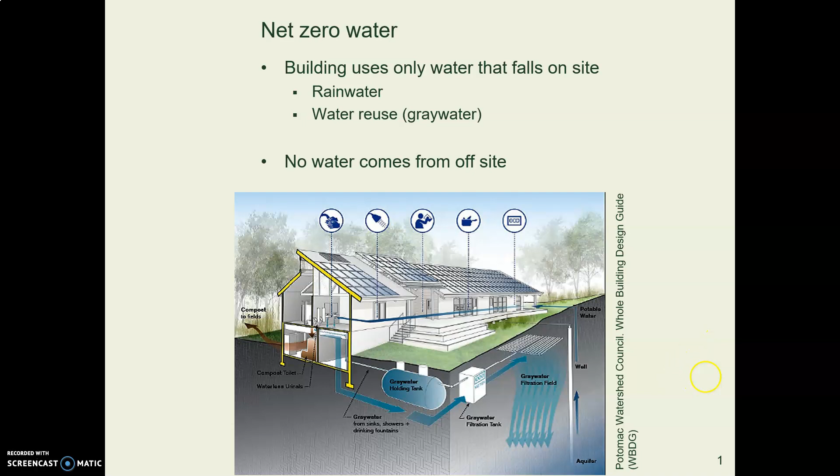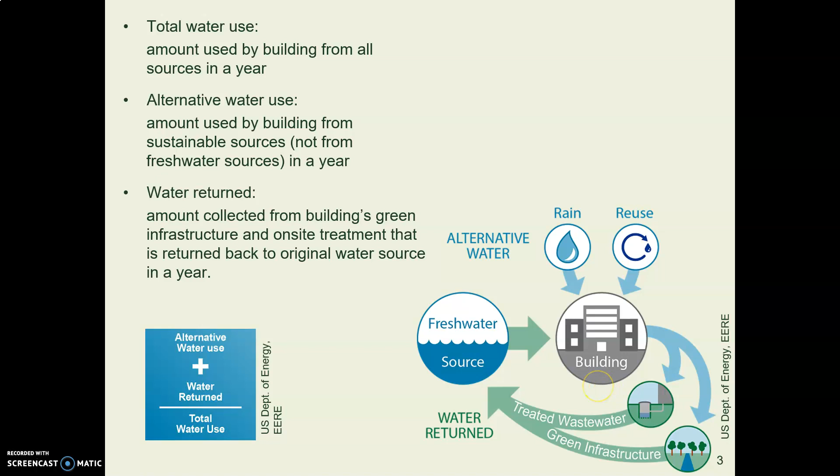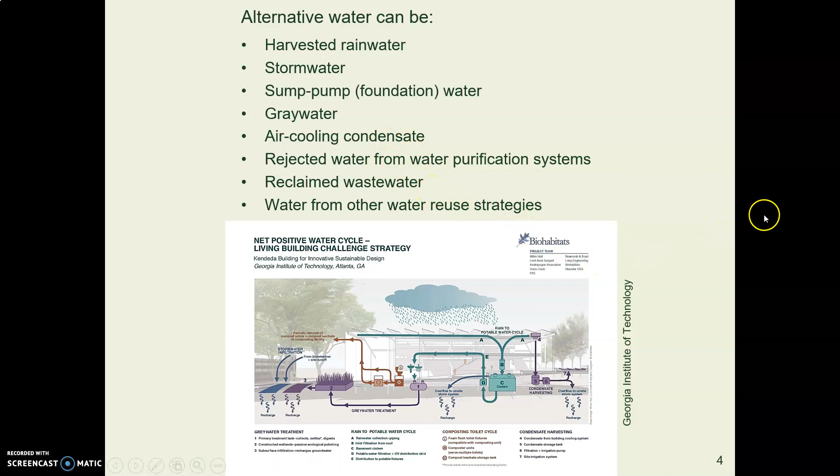This approach relies heavily on alternative sources, and there are a whole bunch of them. We've talked about harvesting rainwater. We can infiltrate stormwater. There are all kinds of gray water sources that come off of buildings, from foundation pumps, gray water, condensate from air cooling, and reclaimed wastewater.

As with renewable energy, where your first step is to reduce demand and do energy efficiency, with water, your first step is to reduce demand, do water conservation, and promote water efficiency. Then after you've done that, you've got your demand down, then you go look for alternative sources and see what else you can do.

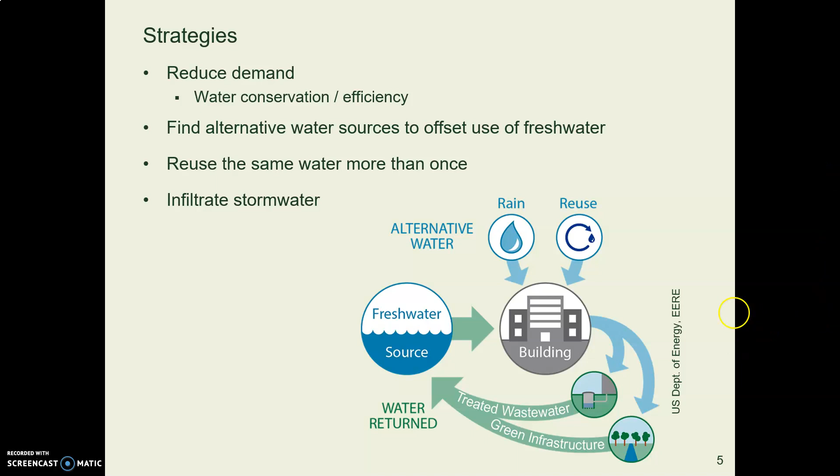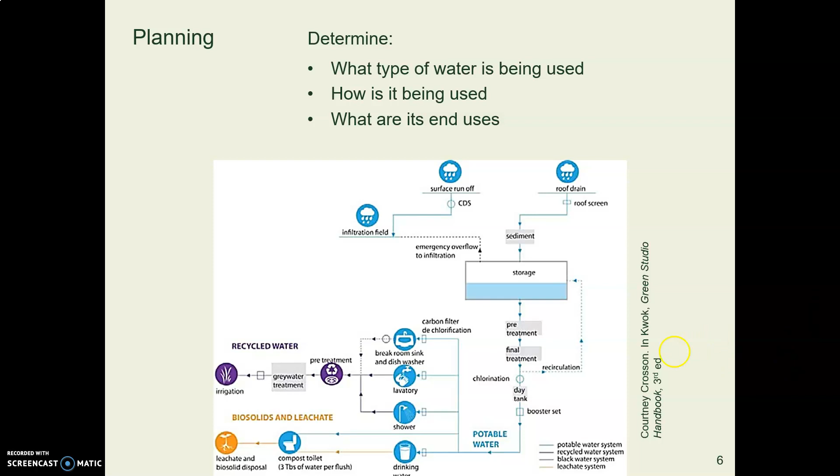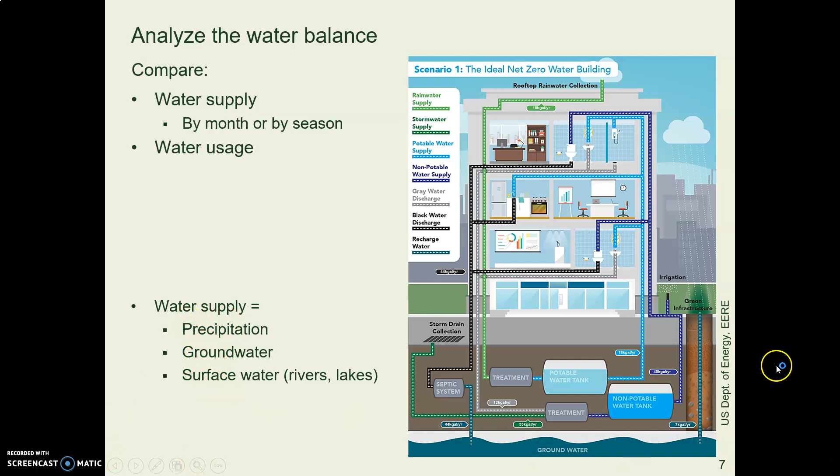You will see that planners and designers have to be very methodical about their planning. They start with a thing called the water balance, where they look at the balance between what water is coming in, including rain, groundwater, and surface water, and what water do they use. In the water balance, they balance what is coming in and what is going out.

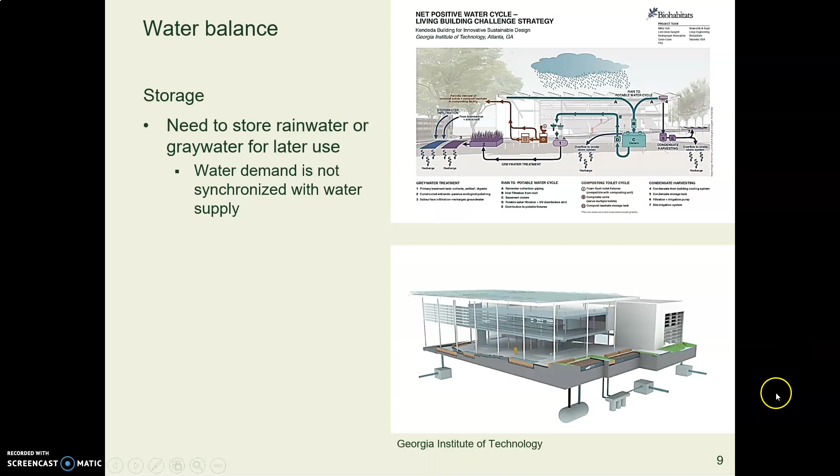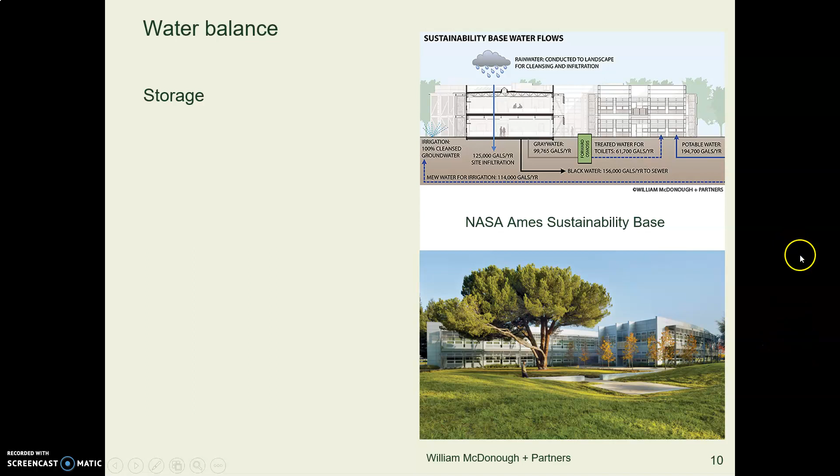Because water coming in, such as from rainwater, doesn't necessarily correlate with when you need water, a net zero water system is going to require storage, cisterns and tanks and that sort of thing. Here's a building for NASA in California that uses storage for its net zero water system.

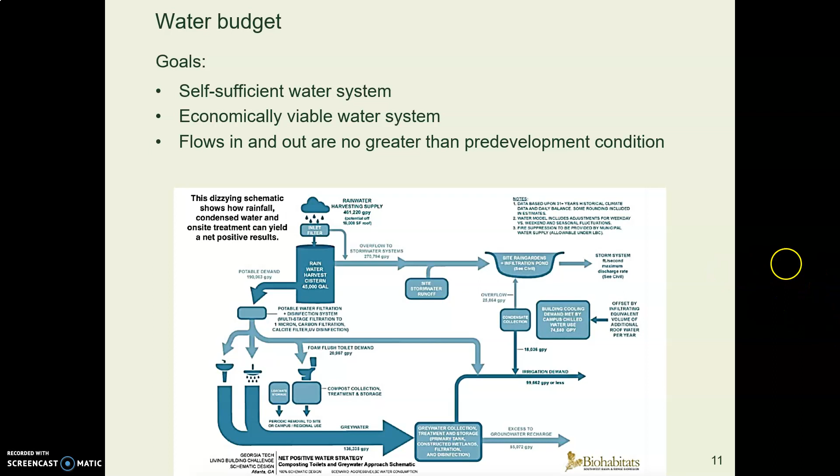So then the designer or planner makes a water budget with numbers, and our goal is to be completely self-sufficient over the long term, so not depend on water coming in from outside.

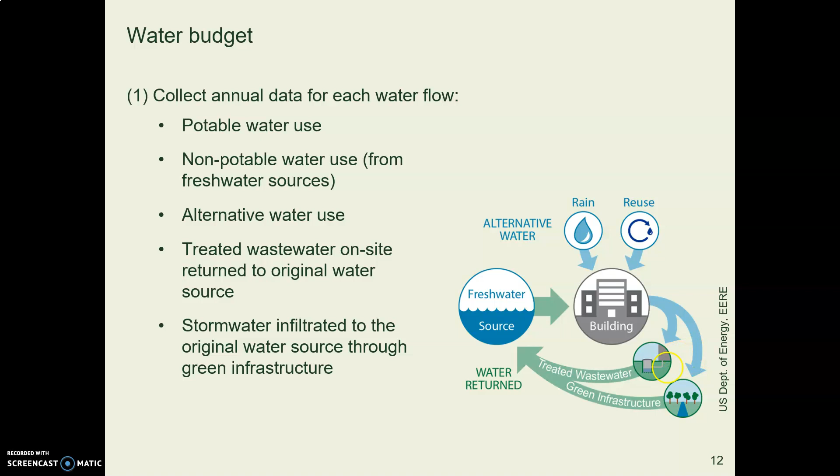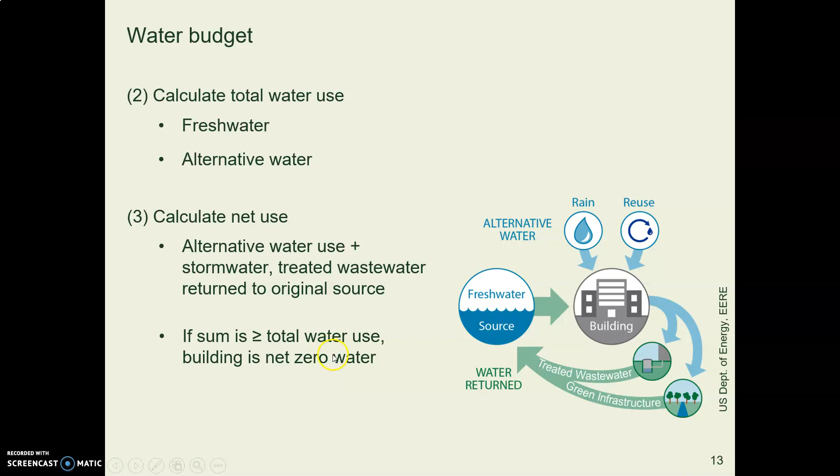And the planner will collect data on all kinds of stuff related to water. How many gallons per day are you using? How many gallons per day does each kind of use need? How many gallons per day do you get from other sources? And so on and so forth. Then you calculate what is your demand, what are your alternative sources, and you see, do they come out to zero? That's why we call it net zero.

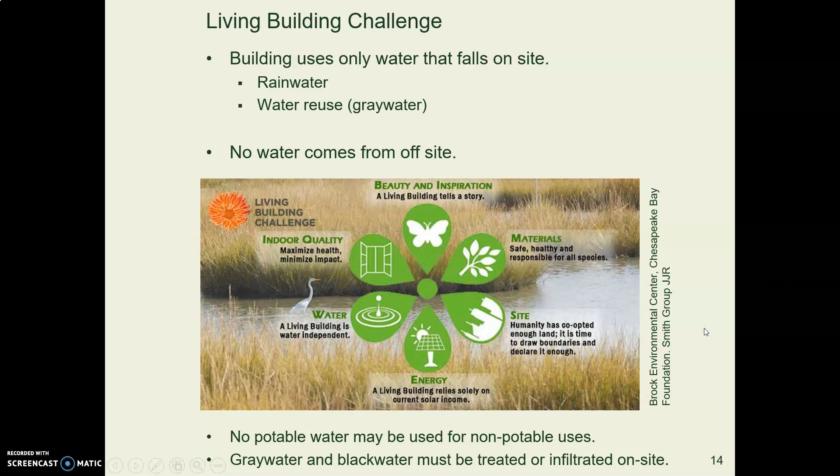So at the beginning of the term, we talked about the Living Building Challenge, and one of its petals is water. In the Living Building Challenge, they require that you don't depend on potable water sources coming from outside. You don't depend on city water. Or if you have city water, the net input and output is zero.

I think we looked at the Bullitt Center in Seattle. The Bullitt Center is an example of a Living Building Challenge, and they have net zero water. Here's a diagram at the bottom that shows rainwater coming in and being stored. They also use gray water recycling, you can see at the top here. And this room with the glass wall and the pipes is so that users can see what the water is doing and where it's going.

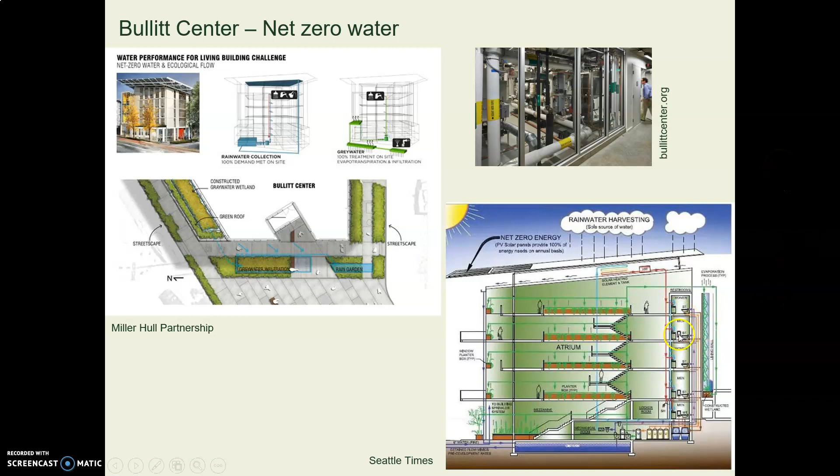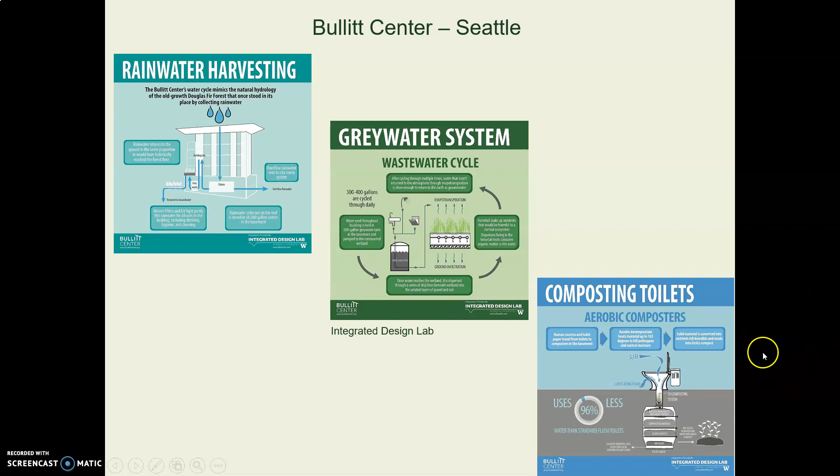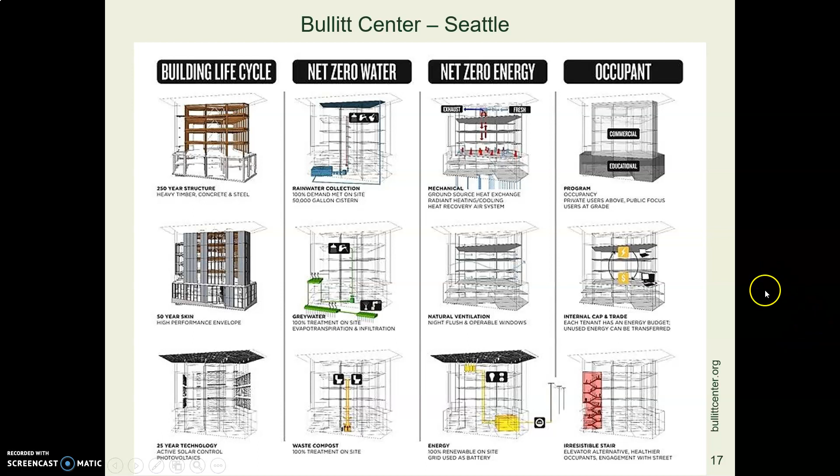So they use rainwater harvesting and gray water recycling. And this building uses composting toilets to minimize water use. You don't have to do that, but they chose to do that. They also have net zero energy. They did a life cycle analysis and so forth.

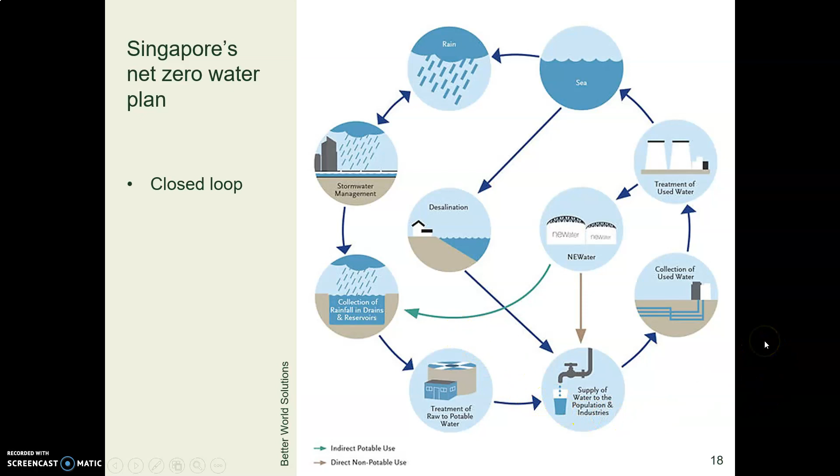Another case study that's large scale is Singapore, which is a city-state near Malaysia. It has a population of about 6.5 million people, and the city planners there got really serious about water. They have water problems. They have a lot of water that comes in seasonally and then other times of year not, and then they have other major demands and major problems. So their idea was a closed loop system where output from one step of the system becomes input for another step of the system, and they were very thorough about it.

They include harvesting rainwater. They're serious about water conservation. They reuse their gray water. Because they're near the ocean, they also can do desalination, taking salt out of salt water. And they have a system for treating black water. They call it NEWater. It's a technical system that is able to treat black water to potable standards.

And if you go online and do an image search, you'll see pictures of people drinking glasses of clear water that come off of the NEWater system. Now, a big barrier to this treating of black water to potable standards is psychology. People just do not like that idea. So one thing that the city-state does is they will, rather than just pipe this into people's houses, they have large reservoirs for storing their water supply, and they will filter small bits of treated NEWater back into the reservoirs, so it's highly diluted, and people seem to be okay with that.

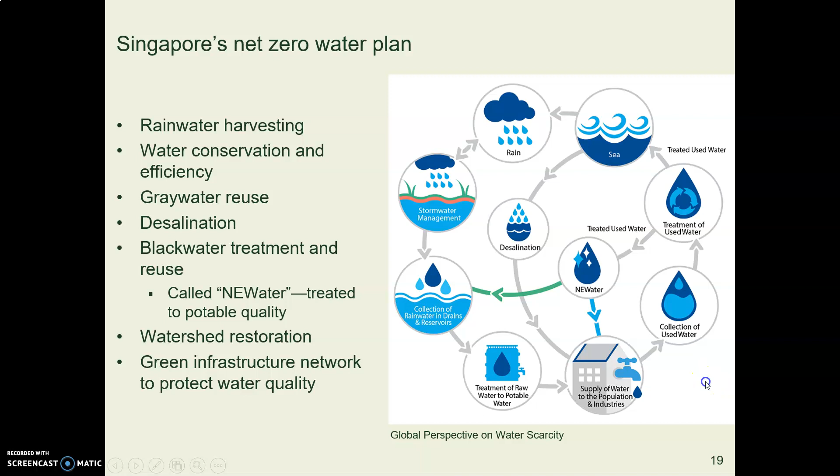And finally, part of their plan involves watershed restoration. A lot of their water falls as rain and falls over land that has been either polluted or covered in concrete and steel pipe, and so they're very serious about working on that. At some point, I think we're going to talk about the Bishan River restoration, where they took a concrete channel next to some public housing, and they totally turned it into a beautiful park with fish and dragonflies and trees that the residents can use. So the whole city-state island is working on green infrastructure to protect their water quality. Very interesting total system.